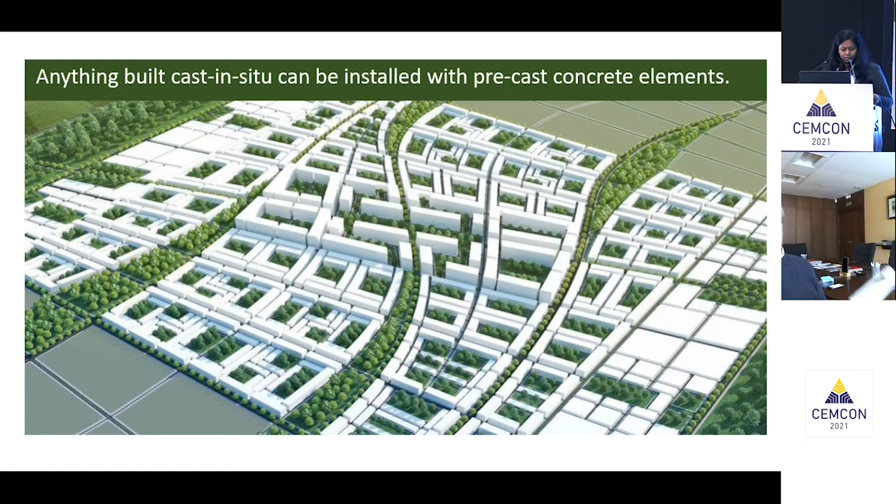When we start considering the investment, we must think, in our opinion, from the beginning in precast, not translating from casting in situ to precast, because we must adapt to the needs of each market.

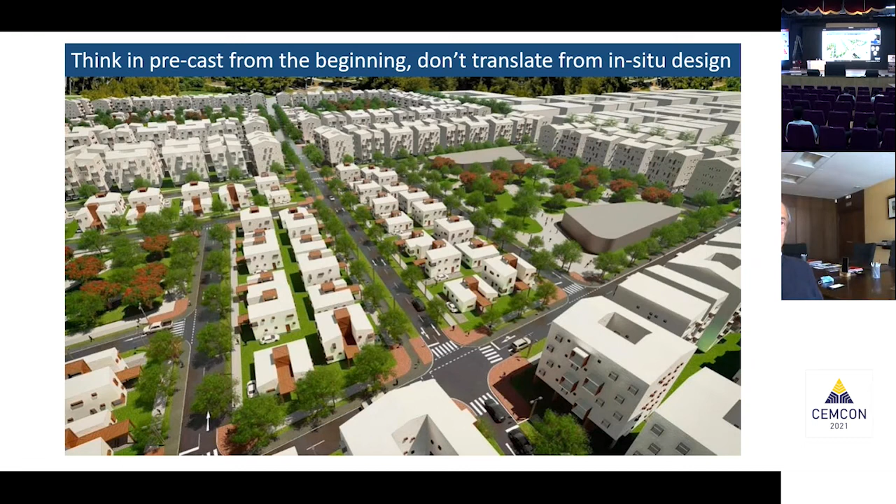We must adapt in terms of social traditions, technology levels, or economic situation. So everything we execute in precast must be adapted to local conditions.

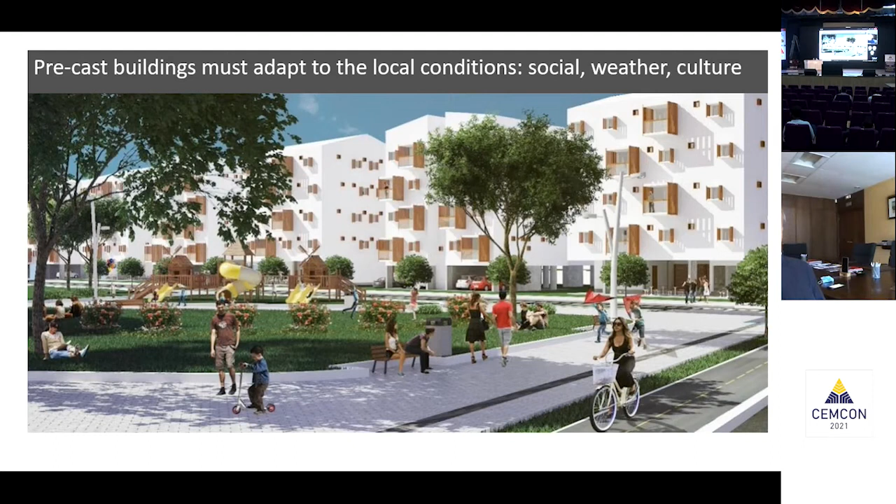One is very clear, for instance, the seismicity of certain areas. When we build in seismic zones, we must adapt to the codes, the traditions, but as well to the safety rules.

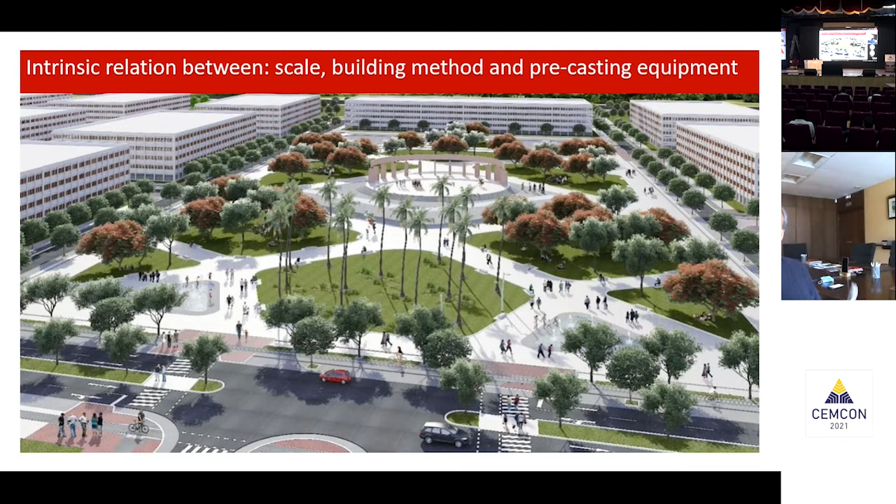We believe that the driving vectors of the decisions we make in precast are basically the scale of what we want to do, the building method that we choose to execute the precast, and as a result of the other two, what equipment we need to acquire.

We believe that when we are facing this investment, we must work on three important points: awareness, the know-how of the new activity and how we react to these challenges, and of course we must always have figures in hand.

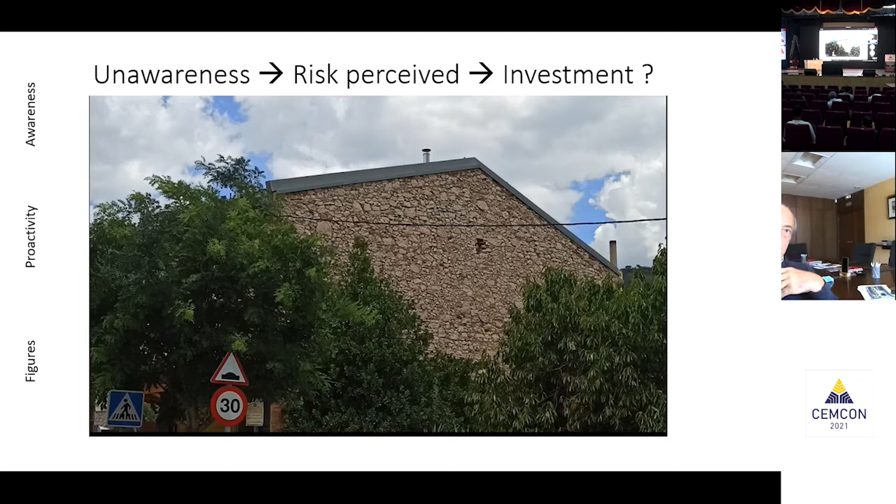Opposite to that, if you are aware, then you control the risk and may decide to go for the investment. Awareness, in just a picture, shows things like how safety is considered, what kind of elevation means are required, what are the pickup points, how is the surface finished, how are the connections — whether semi-rigid or rigid.

A picture is telling so many things. We see pre-stressed elements as well on the roofs. That's what we want to achieve.

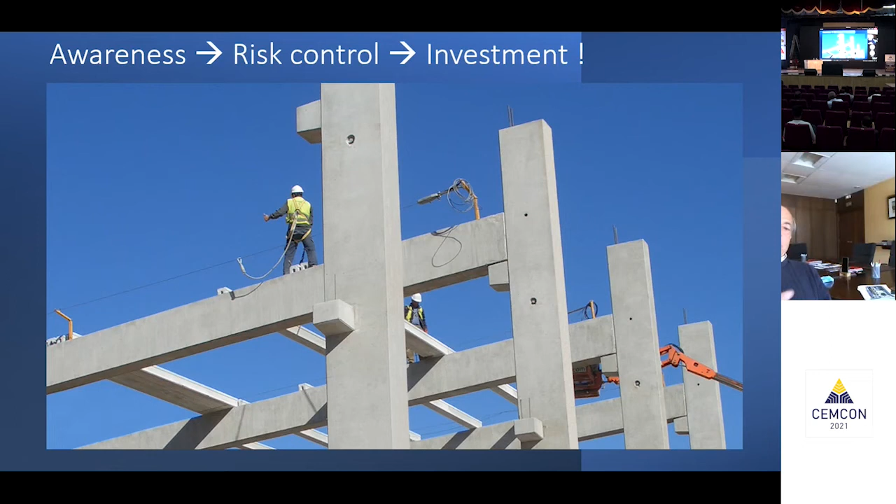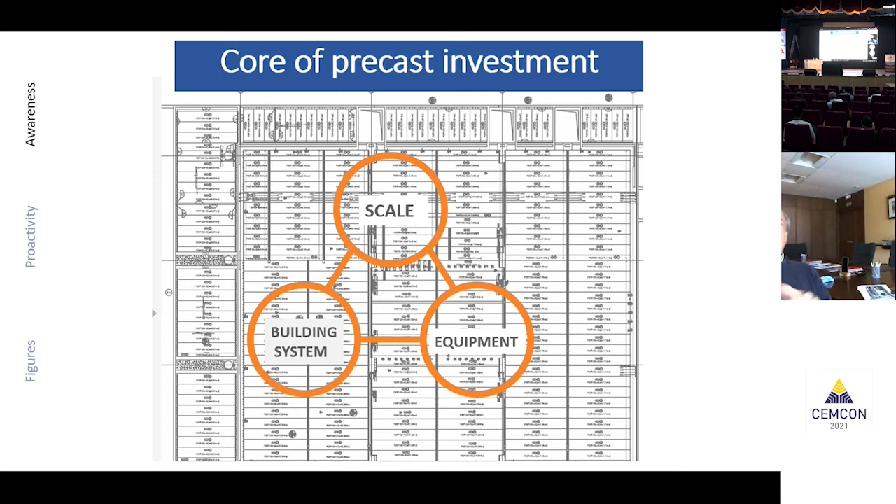So we anticipated before already that the three vectors are the scale of what we want to do, what is the building system selected to proceed with it, and then what is the equipment required to produce the precast concrete elements.

A key concept: we are in Pune now, so instead of building something in the center of Pune and bringing materials there, imagine we have the factory in Chakan. The materials must go to Chakan, and from Chakan we send the elements to the sites. So it's two steps, and there is a new business associated with it, the figure of the precaster.

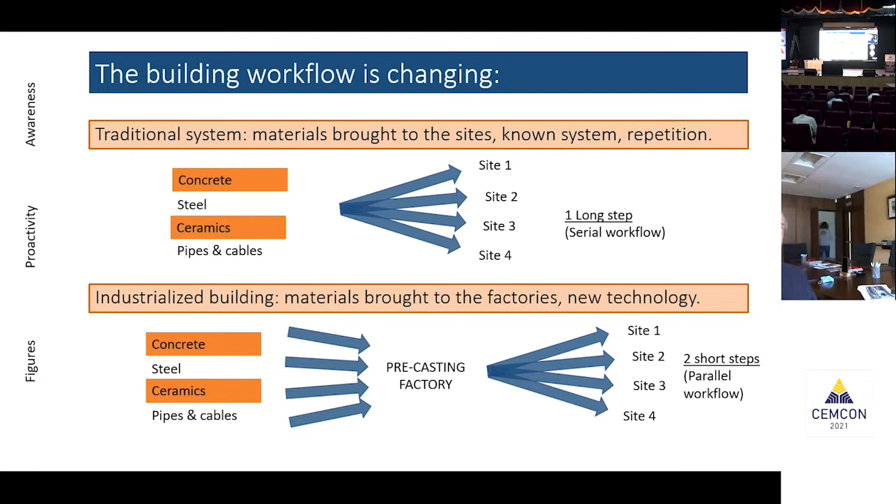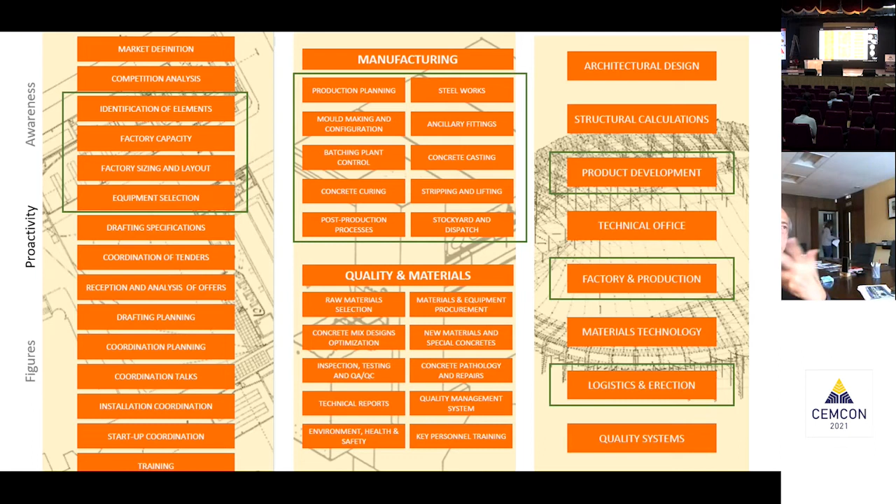Again, we are talking about the awareness and how we react, how we position ourselves before these challenges.

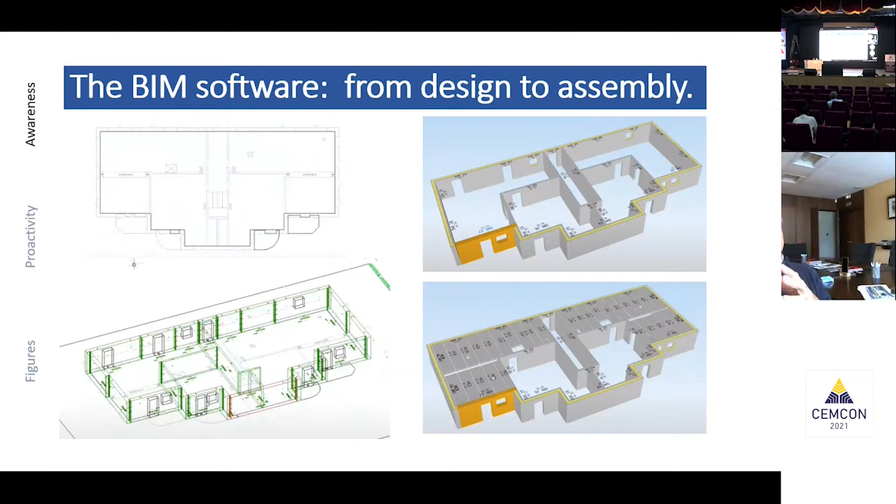We believe that we need software tools to proceed with precast, and these must be dedicated tools, meaning it must not be the addition of different softwares, but a package which helps and controls the complete workflow, from the design of the elements, the structure, the logistics, and the assembly at the site.

This software is basically giving you control. Control is a magic word in investment. So all the elements are identified, and there is traceability on everything you are doing.

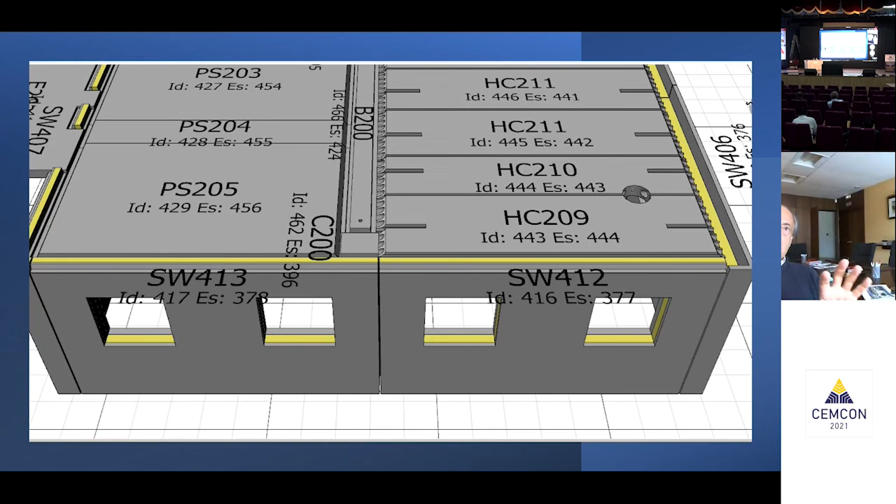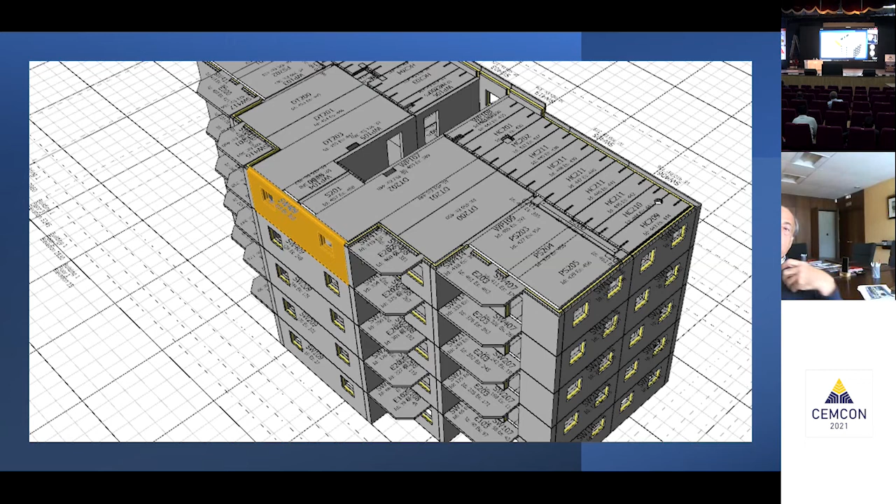Let me insist on that: the control is there from the project itself, the drawings which are in progress, the drawings which are accepted, and the elements which are in production. That gives you the necessary tool required to make sure that in the lead time you are executing everything.

Let's go a little bit deeper into the concept of the three vectors. When we say scale and equipment, that means that depending on the carpet area, you would go for an investment in some kind of products or others. For instance, if it is for floors in pre-stressed concrete, unless you have a demand of 50,000 square meters per year, it would be very hard to justify your investment in this kind of factory.

There are other ways of producing precast elements, which is in carousels. Carousels have a very high capacity, but you must feed the installation, meaning you must guarantee that in 3, 4, 5 minimum years, you will have enough demand to justify the investment.

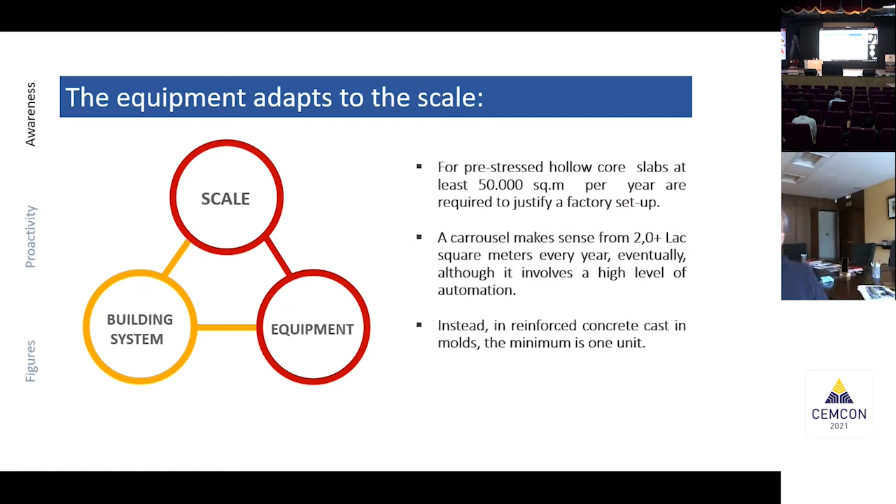Opposite to that, if you have just a table where you want to cast reinforced concrete walls, you can make one wall per day, so the scale of your job is different, and therefore the means required for it are less.

Why the equipment and the building system? It depends. If you are making towers with moment-resisting frames using beams and columns, then you need one kind of mold. If you are making shear walls, that's another one. And depending on how we execute the partition walls, a different equipment is required, for instance for partitions, the battery molds.

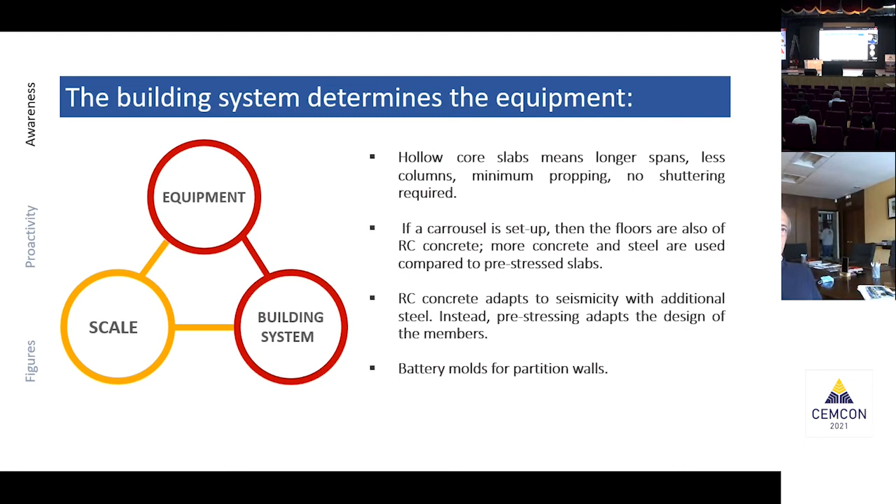Why building system and scale? Well, there is a ratio of at least 2 to 1 in surface between walls and floors, so that gives you the volume of what you have to produce, and that helps define the building system and equipment. We know that in India, for instance, up to G+3 in seismic zones, it is possible to build with load-bearing walls. So here, the size of what we want to execute and the building system are associated, with so many other combinations.

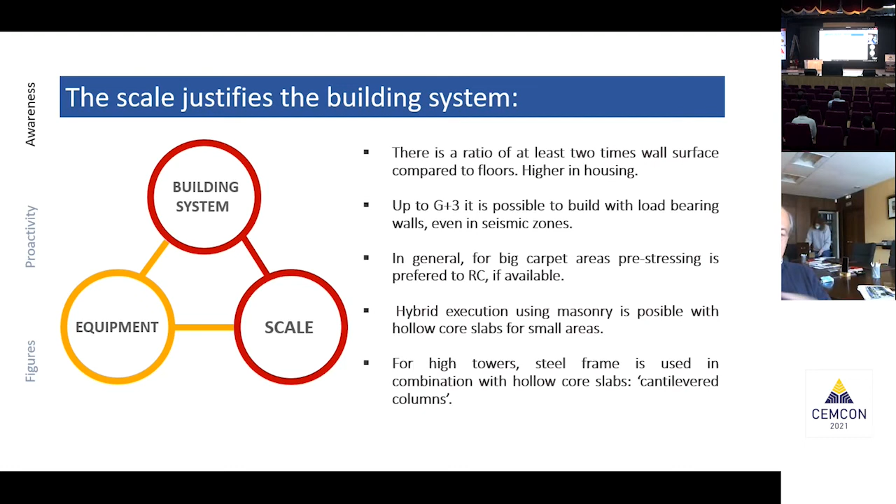Now, these are our general concepts about what happens with our own decision, how we position ourselves in this situation. The challenge, as we said, size is important, but how do we want to behave as investors, and to what level of integration? Do we concentrate just on products, load them on trucks and send them to the sites? Or do we prefer to integrate to the utmost level, delivering finished structures as a developer?

Some products are oriented to margin and they give good contribution margin. The others, maybe even if they have a lower margin, they might be interesting to buy better. I mean, the moment you have volume, then you can source your materials better.

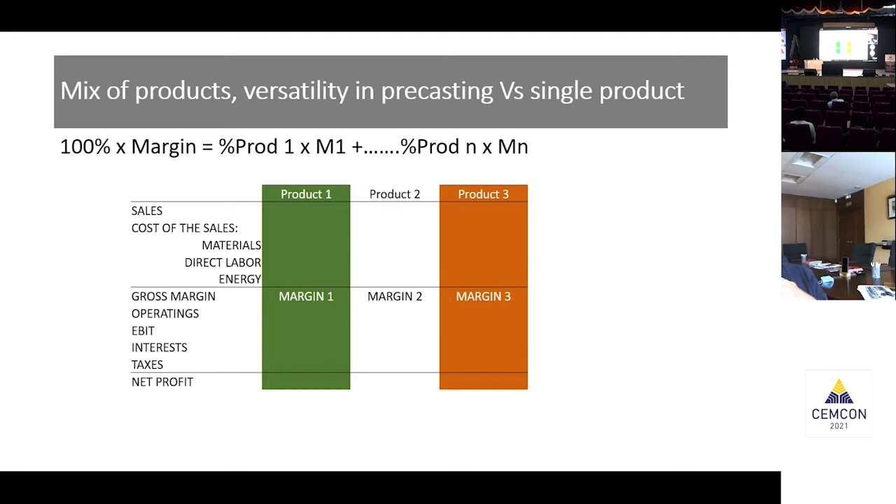Another important point is that your factory is not stopped. It is a key issue. Monday morning, the factory manager, what does he have to do? He must have a program. He must have a calendar of production so that, again, we reach the lead time, and every day we produce the required elements according to a building sequence.

If we consider the investment in precast as a precaster of elements, not of finished structures, the elements can be of different kinds, and it would be wise in our understanding to select those which make sense together, if possible. If it's beams and columns, or if I'm more in the building of hangars, for instance, then we will go for variable beams or delta beams and elements for floors to produce a surface destined to offices, for instance. But anything can be precast.

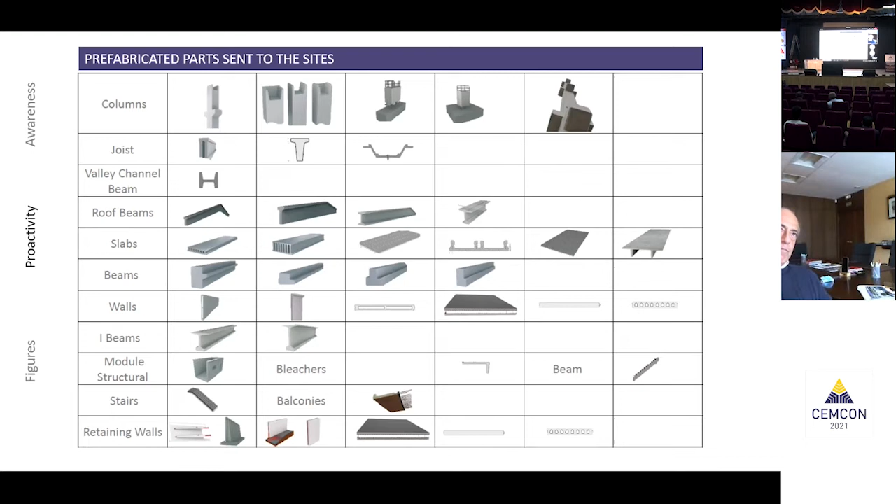This is now immersion to the figures. It seems complicated, there are many lines, but the most important thing is to illustrate that in the investment, part of the investment is fixed and part is variable.

In this case, if we are making floors, there will be part of the floors which will be fixed - the hangar, the shed, the land, this is fixed - and then the cost in equipment is variable depending on how many machines of different kinds you are buying.

Then the lines for the turnover are overlapping the lines for the costing. And the main purpose of that graph is to realize that it might well be that we reach the break-even point with a higher investment than with a lower investment. It's no secret, it's just because we are selling more. This is realistic, it is happening - it's not just nice to put on a graph.

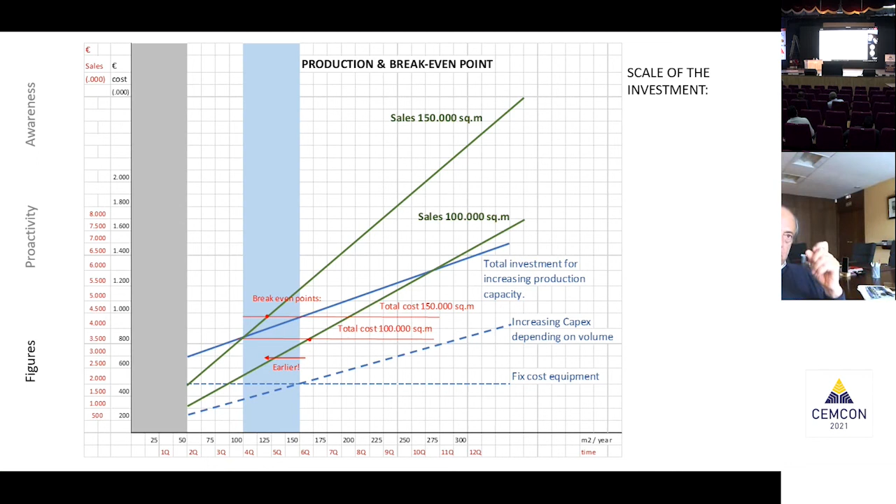So as we said ourselves, okay, who am I? What is the starting point, and what do I want to achieve? The numbers here are just approximated - what's important is the masses, the global percentages of the exercise.

On the left, in black and white, we have a simulation of the investor. He's an investor already related to concrete, making whatever part, and he considers case A: the production of reinforced concrete solid slabs. We are trying to show here a simulation, a tentative profit and loss sheet with direct costing, if an investment of 100 lakh rupee is made, and what would be the additional sales.

One important ratio is this: we believe that in concrete, gross margins above 40% are very much realistic in any case. It is higher if, precisely in the situation of an investor already related to concrete, you are just adding additional products with additional equipment, because the operating costs increase very little.

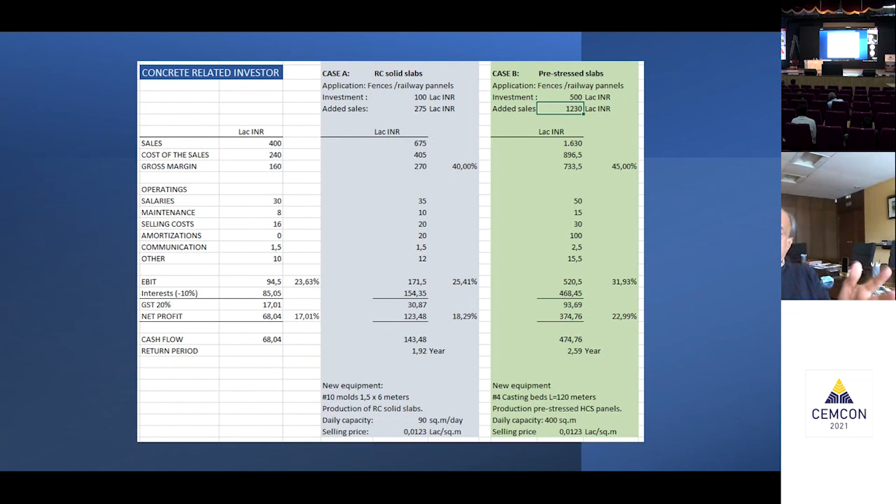It's not that we want to gamble with the numbers - this is the reality of what we are experiencing with our customers.

If you say, okay, instead of a precaster, I want to grow, I want to go for a full precast plant, I want to make everything - and then another case is everything but fully automated - that would be a rough approach of the level of investment and the resulting sales of that exercise.

Again, the return period is not reaching, in our opinion, 4 years - provided, of course, that the sales are there, that we didn't make a mistake in our definition of the available market.

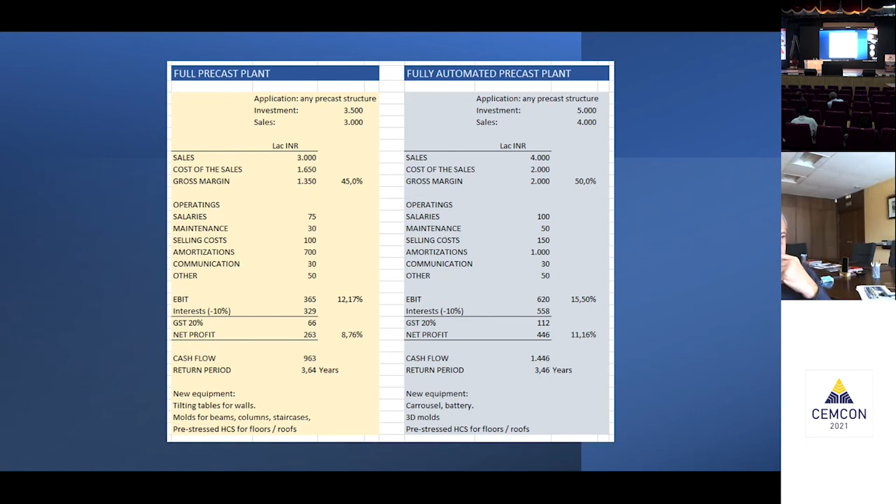So I'm recapitulating a little bit the presentation. The awareness must cover different topics. We don't want to miss anyone so that we make the correct decision. All these topics are necessary.

I mean, how we solve the foundations, how we deal with the stability and the modulation of the buildings from the beginning, thinking in precast. And then lifting means — you had a very nice presentation before.

How is the availability of the manpower? I think every time it's less. It's not in India, it's in many countries. I mean, there are people crying in Europe because they cannot find qualified labor.

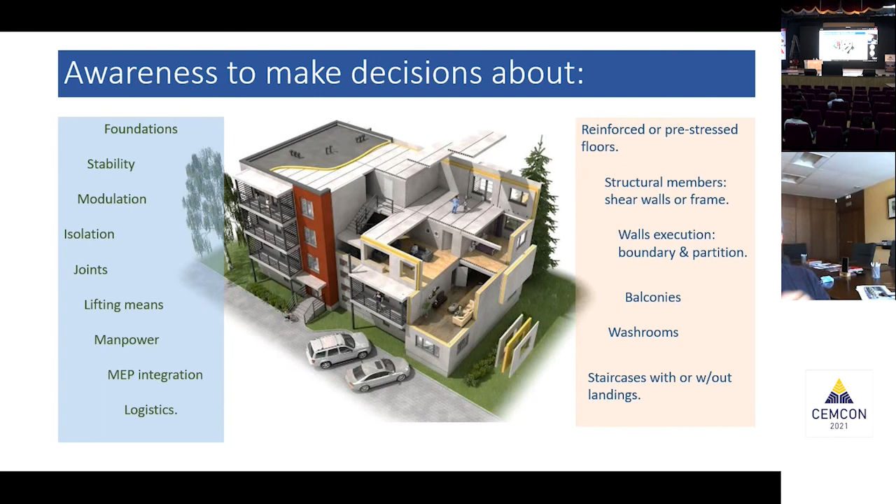We must mention the mechanical, the electrical, and the plumbing elements are integrated from the factory, so this must be solved as well already from the factory, how we deal with the logistics, and then with all these elements we are mentioning here.

What means proactivity? I mean, how we react upon all this situation is we must find our situation in the market. We must identify, if you remember this presentation, with the two axes, which is more oriented to product, more oriented to full precast structure, or I'm more oriented to one volume or less volume.

We must foresee already sustainability. I mean, the precast is sustainable by itself. Moreover, if we consider pre-stress, because we are using less steel and concrete. But as well, we must start considering things like the isolation in not just walls, but as well roofs and how we use materials for that. Because today's presentation is about advanced precast, so we want to use elements which are not old or legacy before we start.

We must, in our opinion, to challenge with this investment, offer as much versatility as possible, more in a country that is not used to use precast. So we must be ready for anything. If we make an investment for reinforced concrete walls and we don't have orders for precast reinforced concrete walls, what do we do then? But if the factory is prepared, it's much better.

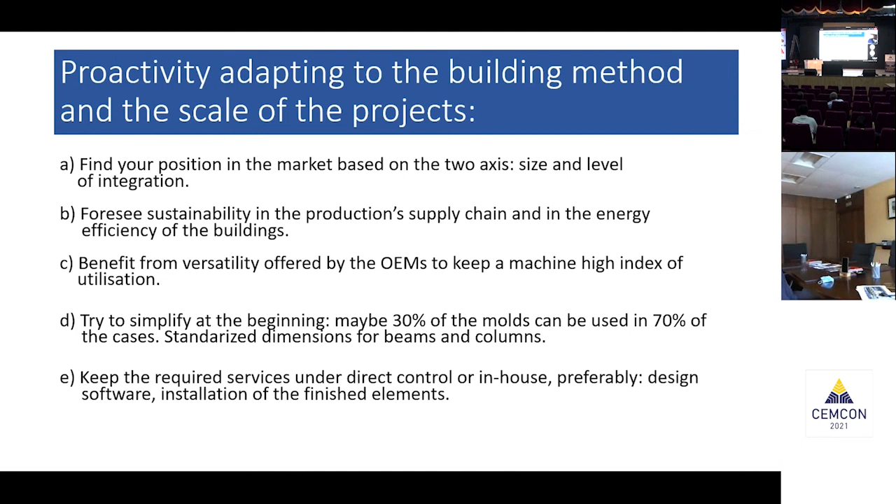About the numbers again, the financial approach. We believe that gross margin of 50% should be a reasonable target, and that the total operating costs should not reach 30% of the turnover. As we said before, the return of this investment — here we are not considering the internal rate of return in these financial terms because the return is short term — so we believe it should be in 2-3 years.

As this activity is generating sales immediately, the challenge, to be more specific, is the treasury, how we deal with the treasury.

And then I'm sure you will have many more ideas and probably better than these, but let me mention a few. Short-term leverages with the supply chain, how we can deal the payment terms with the suppliers. If we are paying the equipment with LC, can this maturity be extended in a way? Because the moment we are selling and invoicing and receiving the payments, that is paying for everything by itself. So trying to reduce the peaks of required working capital is crucial here.